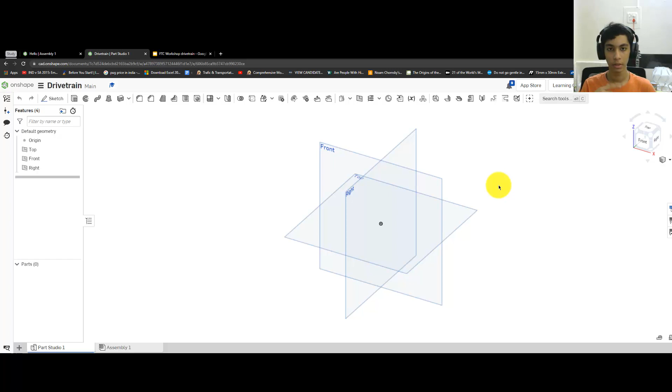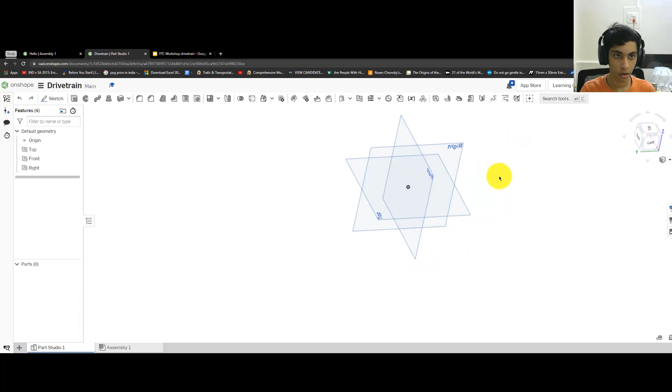Just a few basic things about Onshape: I would suggest that you guys use a mouse while doing the CAD in your software, it becomes much easier. If you do a right click on your mouse, you will be able to revolve around in this manner, and if you click on the scroll button, you will be able to pan around and move around the model. So first we can see Part Studio and Assembly, these are the two tabs which are open in Onshape.

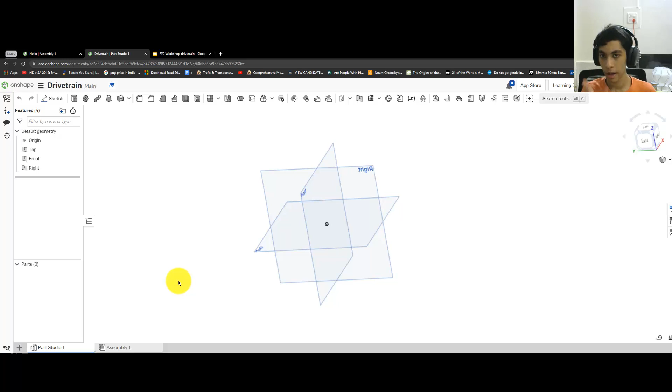What we want to do next is first import all the parts from the part list folder which I will be providing. We click on Insert New Element, the plus sign, then click on Import.

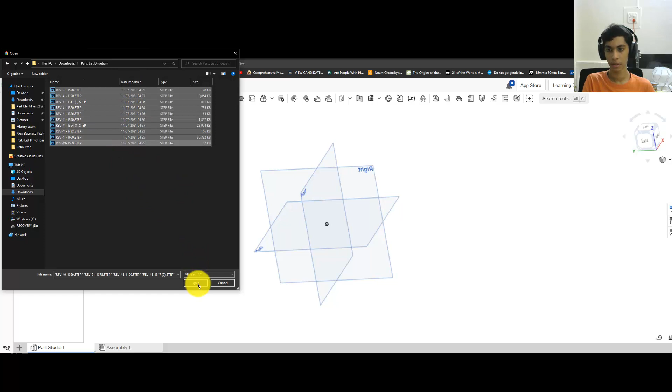Here you will need to search for the folder. There it is, Parts List Drivetrain. And then I would like you guys to select all of the files. There are about 10 of them, and click on Open.

Next, if you see something like this, you can go ahead and select Combine to a Single Part Studio and then click on OK. You will see a couple of notifications, which means that the parts are uploading, and this takes about 2 to 3 minutes.

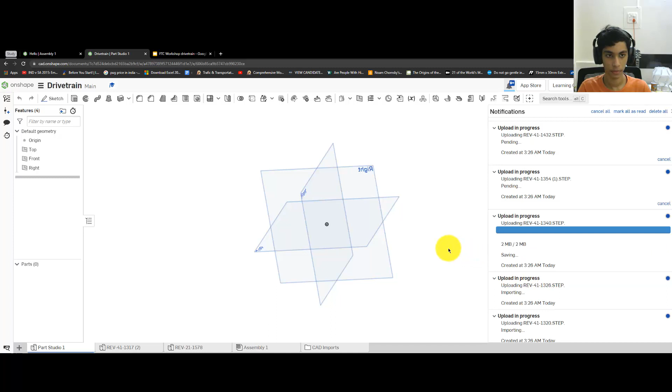So you can just look around in this menu itself if all the parts have been uploaded. As they start uploading, at the bottom you will be seeing more tabs coming up.

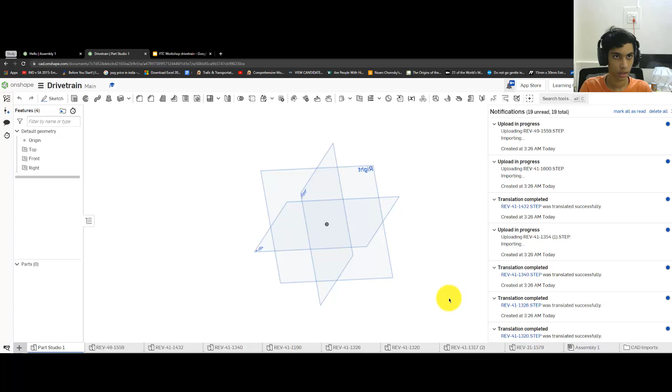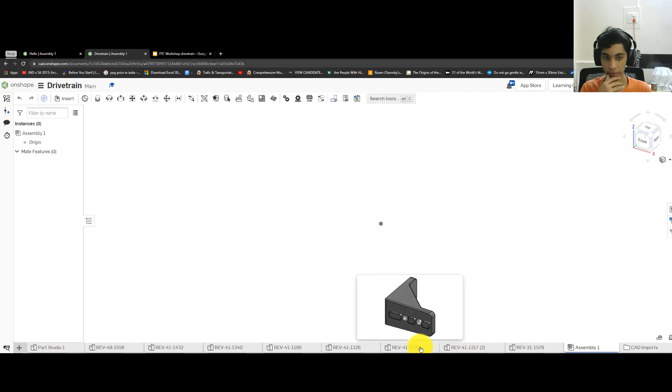Next we want to click on Assembly 1, where we will assemble all the parts. Just to give you an overview, this is a motor mount part which we will be using. This is called a pillow block, which will be used later on. This is a corner bracket, and there are many such parts which we will be using. So first go ahead to Assembly 1.

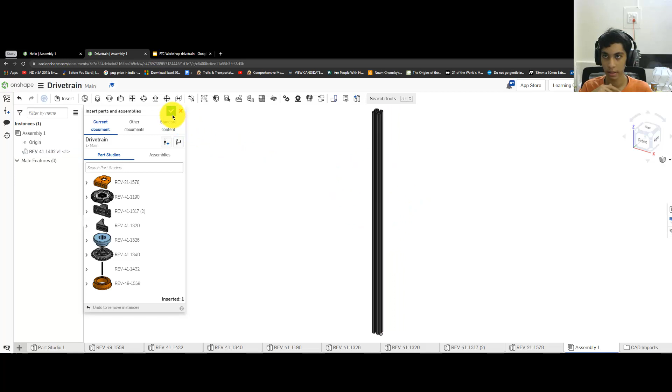Then we will go ahead and click on Insert, and I want you to import Rev 41-1432 in here. Once you've done that, click on the tick mark, and this is our first part.

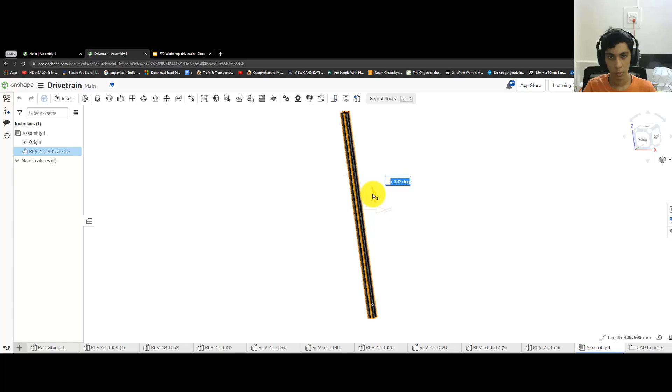Now we will select this by clicking on it. You can revolve by a right click, you can do pan with the scroll button. What we want to do next is get this laying flat. Right now it's vertical, so we will select that button and type out 90 degrees, then click on the white space, and now it has become horizontal.

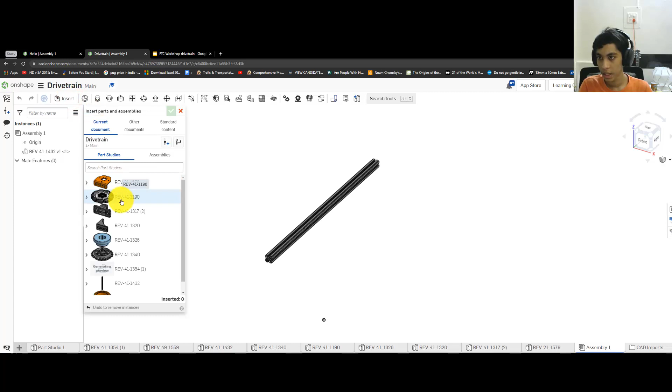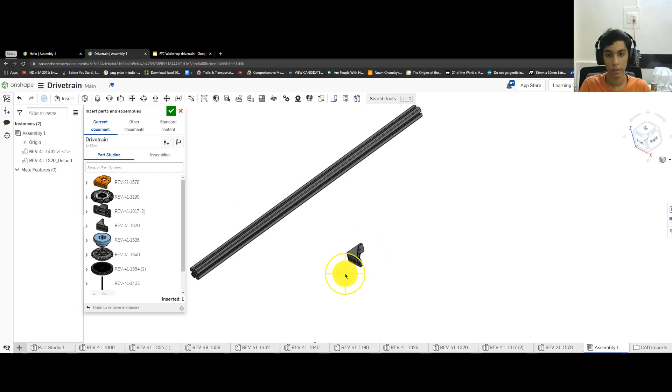Next we will need to insert the corner bracket, which is rev-41-1320. If you click on that, your mouse pointer will get the part in the workspace, and you can then use the part wherever you would like to. Then click on the tick mark and we are good to go.

So if you revolve around now, here we will try to join this part, which is the corner bracket, with the extrusion, which is the main structural component of the robot. We have used a lot of extrusions to make the wheelbase or drivetrain strong, and we have used corner brackets very often, so we will be doing that here too.

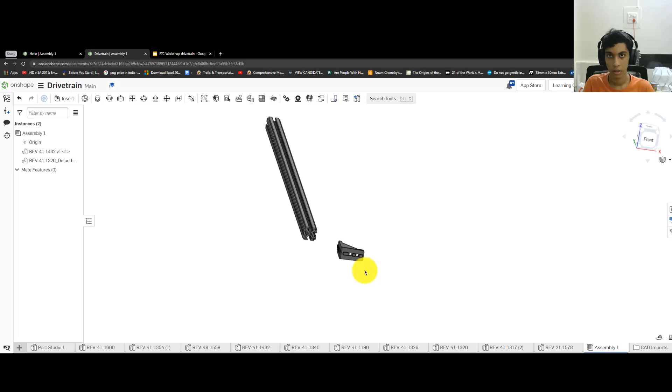Now what we have to do is go to this menu over here and click on Fasten Mate. Once you do that, you will see such a menu appear.

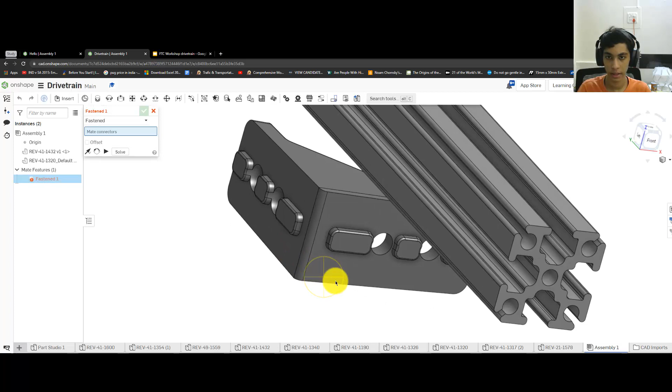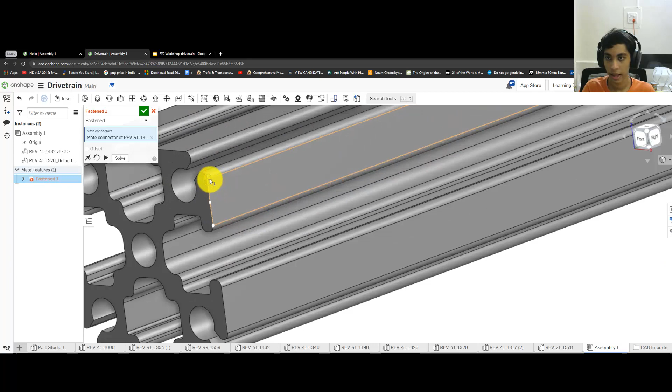Now you have to zoom in to the corner bracket. Hover your mouse over the flat surface of it, and you can select the point in the corner where my cursor is. Then zoom out, revolve again with the right click, zoom into the extrusion, hover over it, and do a left click on that point. If you zoom out and revolve a little, it looks something like this.

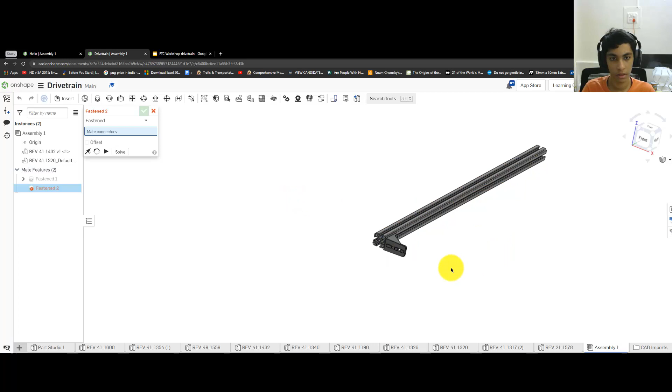And then you click on the tick mark. Now you have to close this button for a fasten mate too, because we don't need another fasten mate.

Now if you try to move it around, if you do a left click on it and try to drag it around, both the parts will be intact whatever you do. If you move this around too, they will always move together.

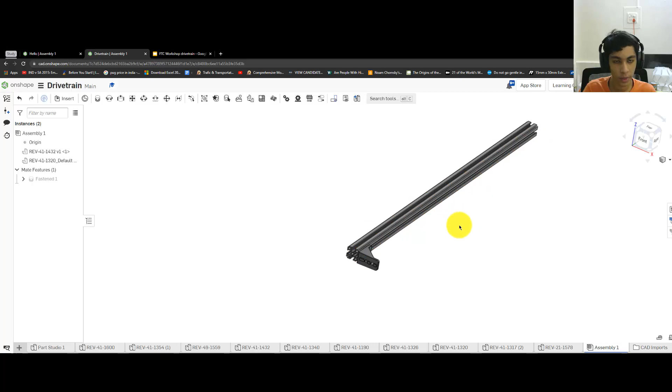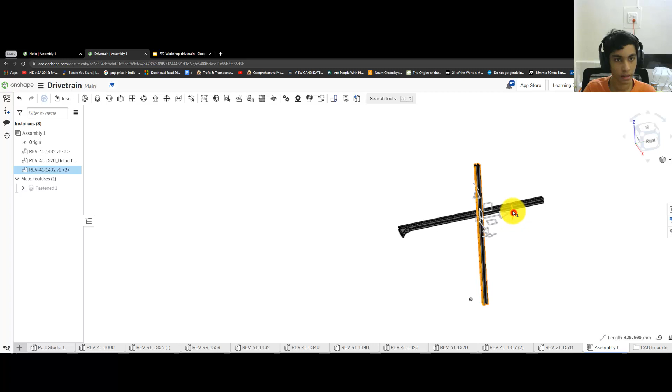Next we click on insert, and insert the rev-41-1432 extrusion again. Click on the tick mark, and we want to make this 90 degrees laying flat. So we will click that button, type 90 degrees, press enter.

But this time we need it turned in this fashion. So if you go to the top view, we want something like a plus sign, so 90 degrees, and press enter.

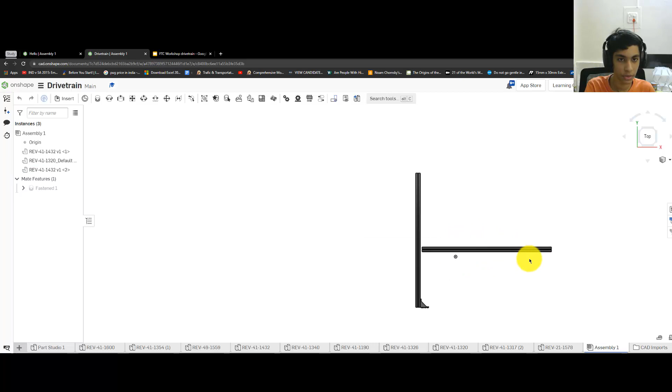This extrusion has to be placed somewhere over here, and so we will also do another fastened mate. To do that, we will click on fasten mate, and hover over the new extrusion. So we will select that point.

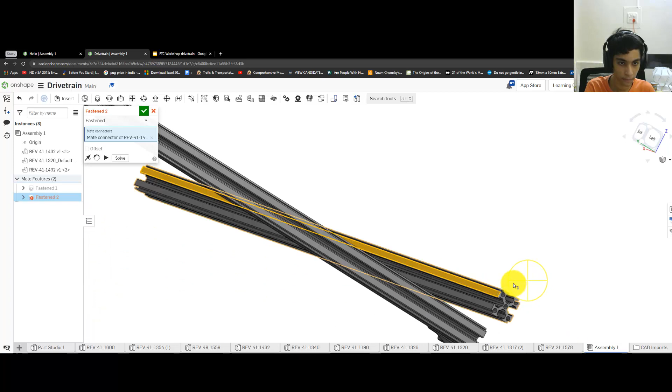After selecting that point, we will zoom into the corner bracket from earlier, and select that point again on the corner bracket, then click on the tick mark, and it shall look something like this from the top. They will always move together now.

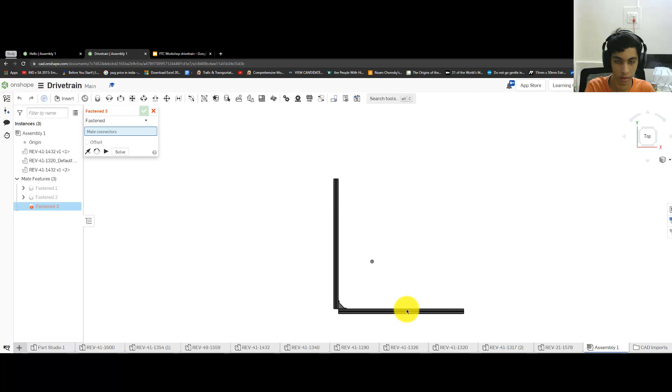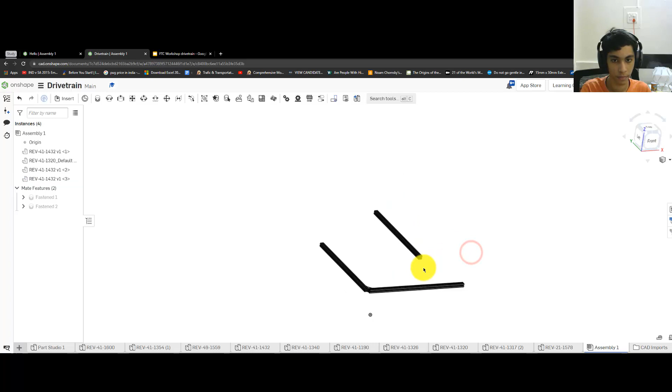Now we want to insert another extrusion, and this one too has to be horizontal. Along with the extrusion, we will need another corner bracket.

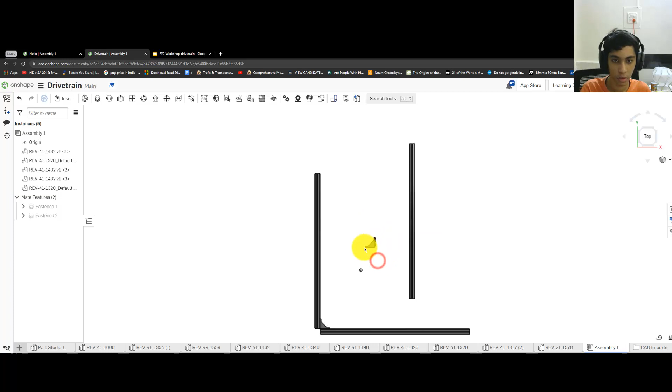The corner bracket has to fit over here. So we will rotate this by 90 degrees and click on enter. So we want this kind of an orientation for the corner bracket to come here.

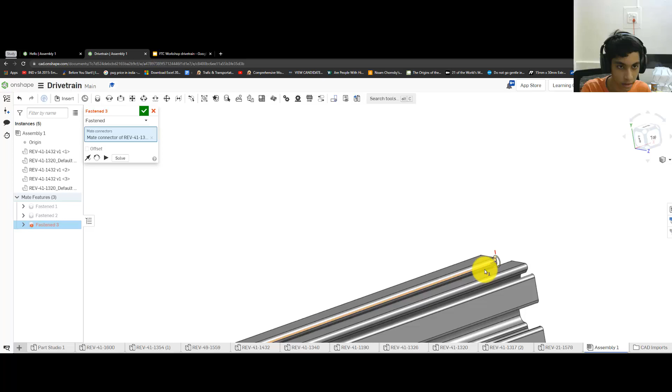We will click on fastened mate. We will hover and select the top right corner point. Then we will revolve a little and go and select this point over here. Once you manage to do that, it will look something like this. We will press on the tick mark.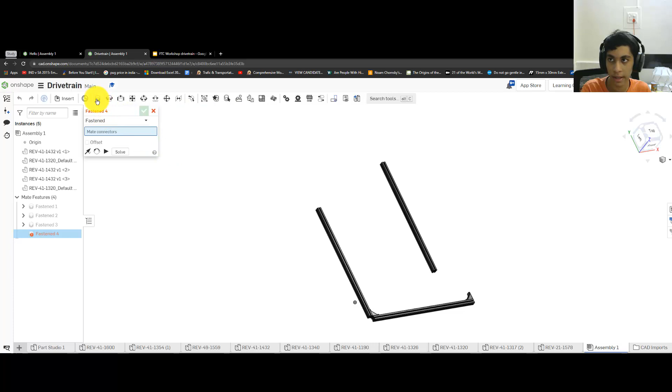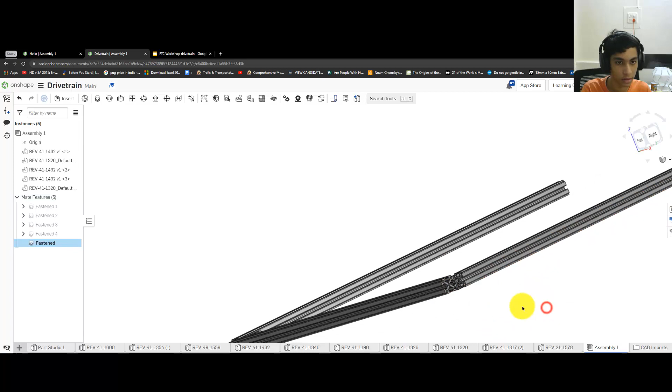Now to join this extrusion to that corner bracket, you have to select fasten mate, zoom in, select that corner point, revolve a little with the right click, and go ahead and select the top left corner point here, then click on the tick mark. So now from the top you should see something like a U shape which you have made, and this all moves together whenever you try to drag it.

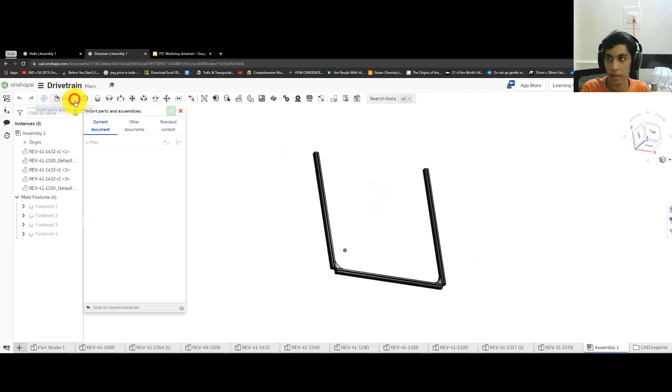Now to close the U and make it a proper square from the top, we will click on insert, insert a corner bracket, then click on the tick mark.

This corner bracket needs to join an extrusion on top to close the square. So it has to be positioned something like this, which is some sort of an L shape but inverted.

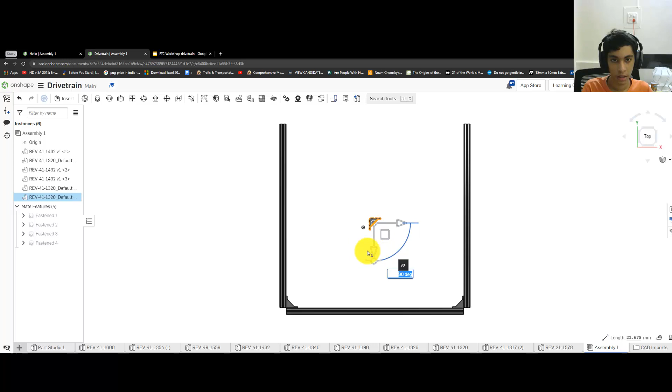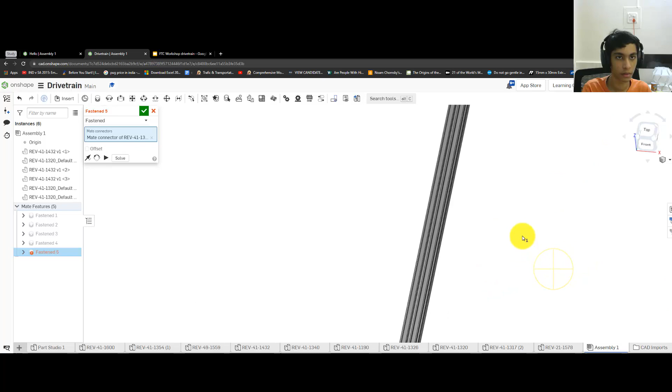We will then click on fasten mate. We will hover over, select the top right corner, then zoom in and select this point here.

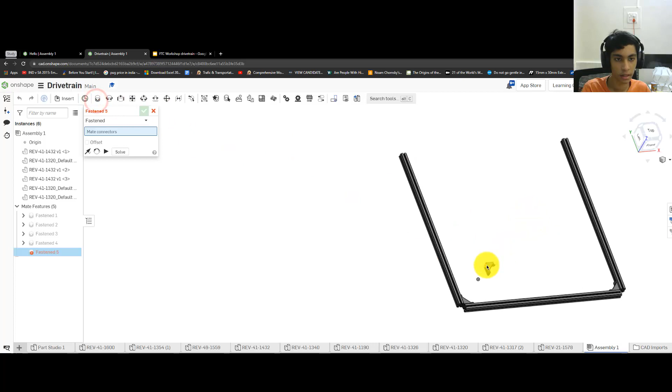I think it's gotten something wrong. We can try that again. So you can just cancel it and click on fasten mate. I think we should select the top left corner this time, so it's easier. Revolve a little, zoom in, and select that point. And now we have a corner bracket.

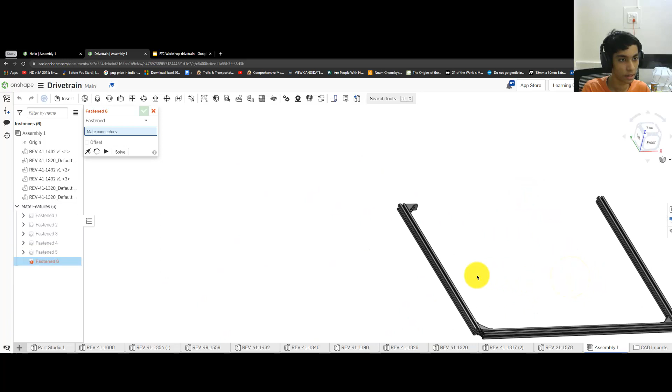Similarly, to join the extrusion from this end, we need another corner bracket. So we will click on insert, insert a corner bracket. And the corner bracket has to be oriented something like this, 180 degrees, and click on enter.

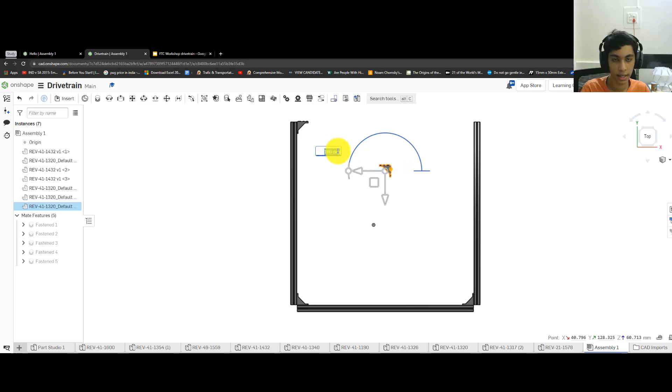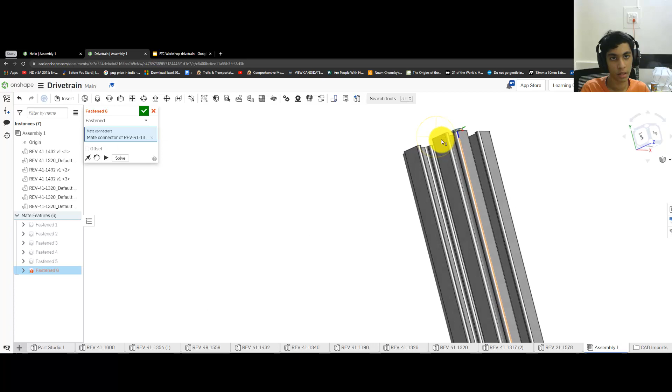We will click on fasten mate, select the top right corner, zoom in, revolve a little using the right click, and place it over there and click on the tick mark.

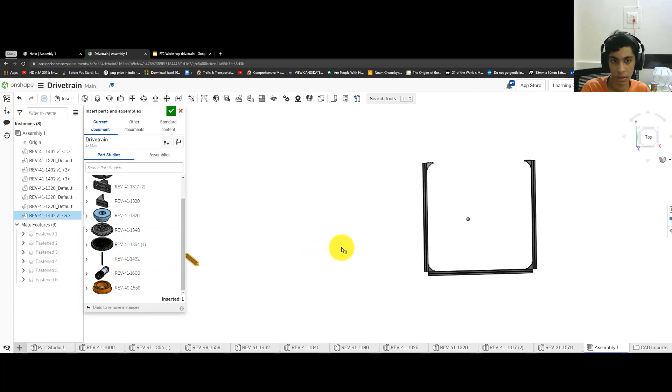The last step to making the frame is inserting another 1432 extrusion which comes there. This extrusion has to be aligned horizontally, so we will align it horizontally. Type out 90 degrees and click on the white space.

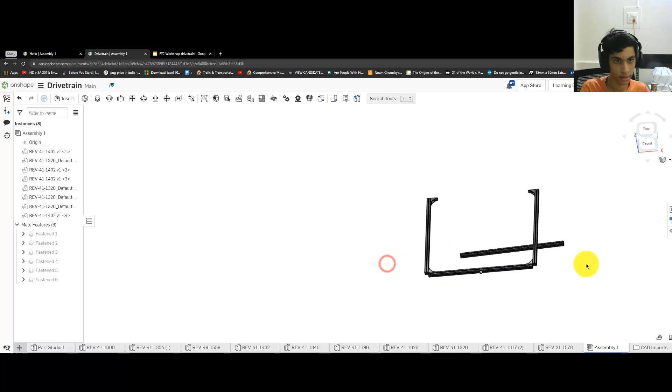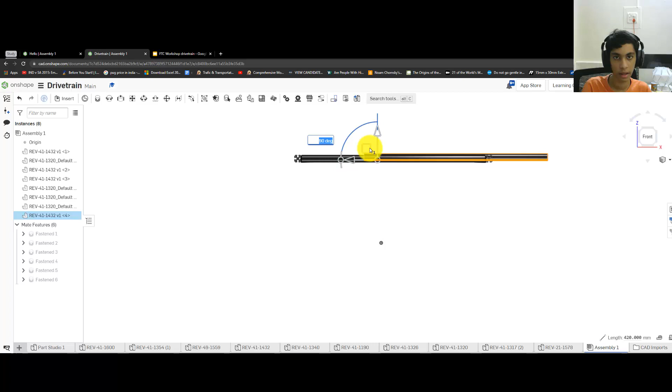You can do a Control plus Z to get it back into the original state. I think there was some problem, so we can do that again. Control Z would work here. We want it to be 90 degrees to lay flat. Okay, we will click on fasten mate.

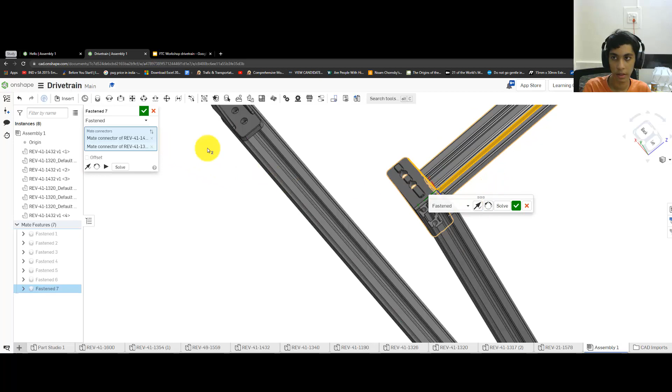And it's just following the same steps that we had followed before, doing a little revolving, moving around. I think I selected the wrong point there, so I will do that again. Click on the tick mark, and if you guys see, now we've formed a full square which resembles the square on the outside of the drivetrain.

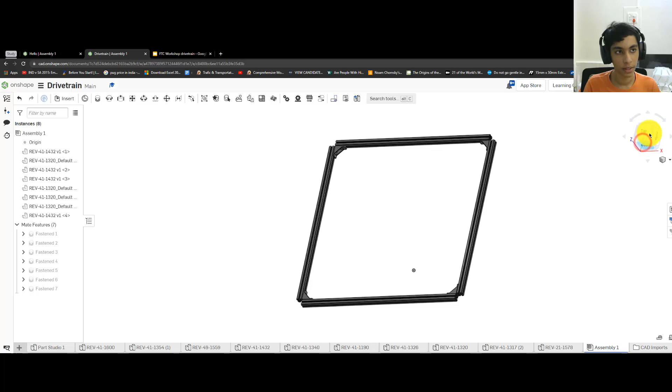Our next step is to introduce the bars in the center, which will add more strength to the square we have made, the chassis or drivetrain structure which we need. For that, we will need more extrusions, which we will either insert, or there's a shortcut for doing that, which makes everything much easier.

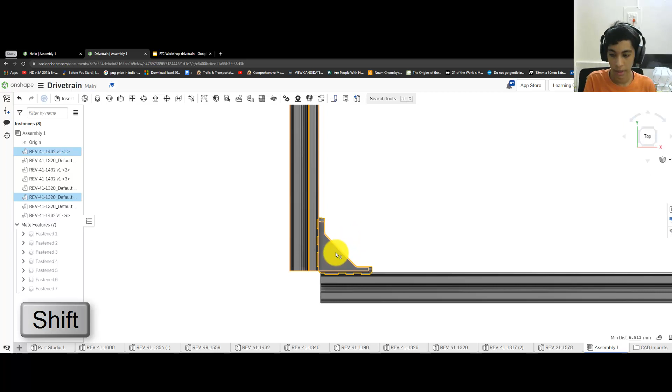So what we can do is go to the top view. We can first click on the extrusion, press the shift button, zoom in and select the corner bracket, then zoom in and select the other corner bracket also while pressing the shift button, and you will now be able to select all three of them together.

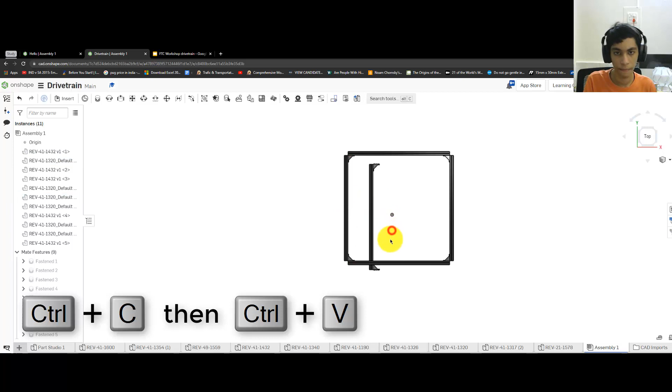Now what we want to do is press Ctrl plus C to copy it, and Ctrl plus V to create a paste of the copy we have done. If you try to see now, you can find the copy of the three parts we had selected earlier, and this copy will act as a bar which we wanted in the center. There are four of them here: 1, 2, 3, and 4.

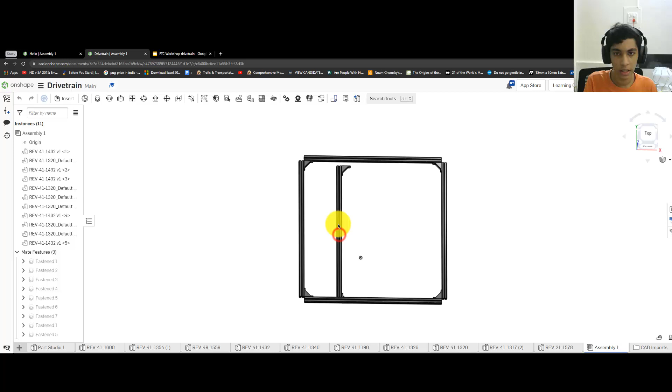And if you try to move it around, it will always retain the joints which we had made earlier, so the parts haven't gotten separated.

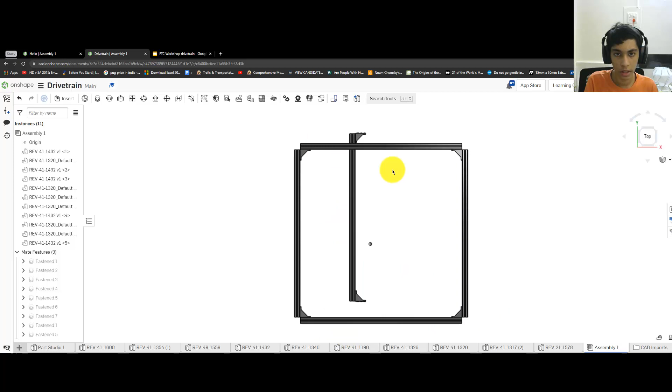We will then click on Fasten Mate, but this time Fasten Mate will not work for us because we need to be able to move this bar wherever we want inside this frame. So now we will select the Slider Mate instead, and if you selected the Fasten Mate by mistake, you can go ahead and select the Slider Mate.

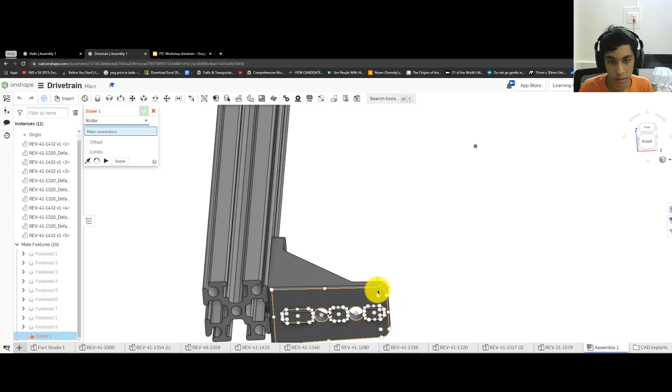Now we want to zoom in and select the top right corner. We want to revolve around and zoom in and select one of the surfaces on the extrusion, so that corner bracket now comes over here before you press the tick mark.

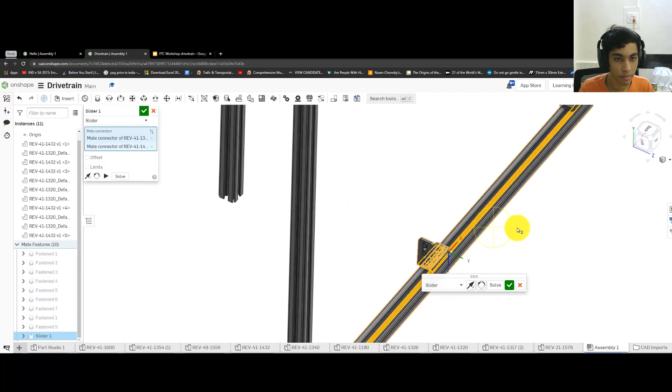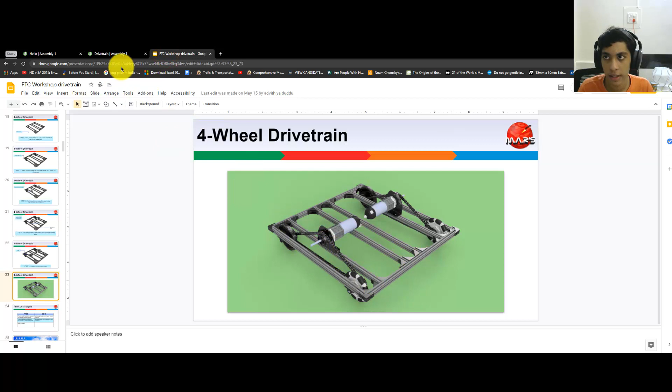But if you notice over here, the extrusion is somewhere near the extrusions on the left hand side. So for that, we will click on offsets, and we will offset this by a little bit, in the X direction.

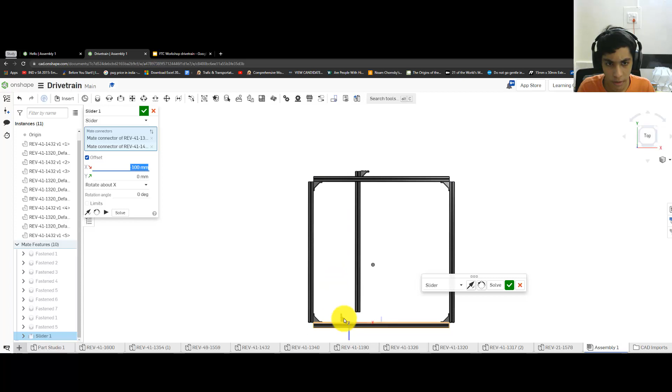So we want to move it over here, and in the X direction, let's try minus 100 mm. And minus 100 mm seems to work perfectly. So if you see, the position has moved from here initially to over here in the X-axis.

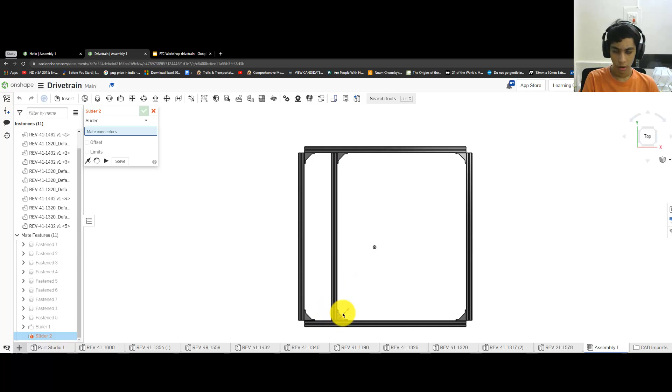And if you click on the tick mark, then all the parts which were joined to the previous corner bracket will also snap in.

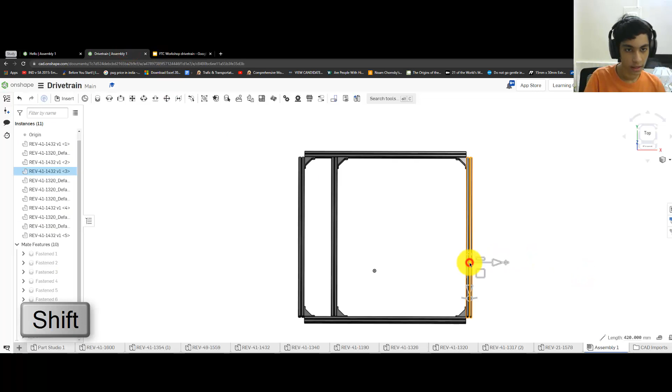Similarly, we want to make another copy of this side, so that we are able to make the supporting extrusions in the center from the right hand side. So we will first select this extrusion, then press the shift key, select that corner bracket and this corner bracket, Control plus C, and then Control plus V.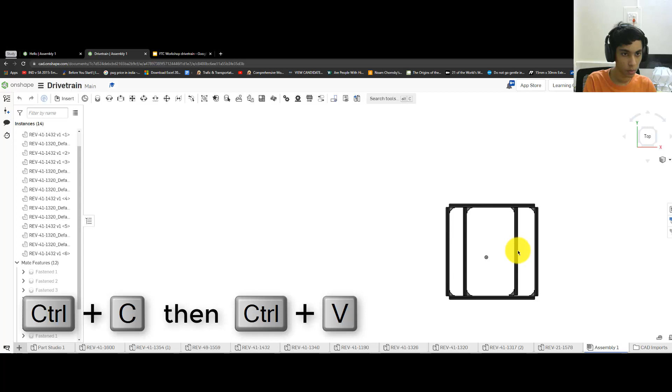And if you see now, you can find a copy of the extrusion which can be moved around. So we want it somewhere over here, but we need to make a joint, or a mate for it. So we will do the same procedure like before.

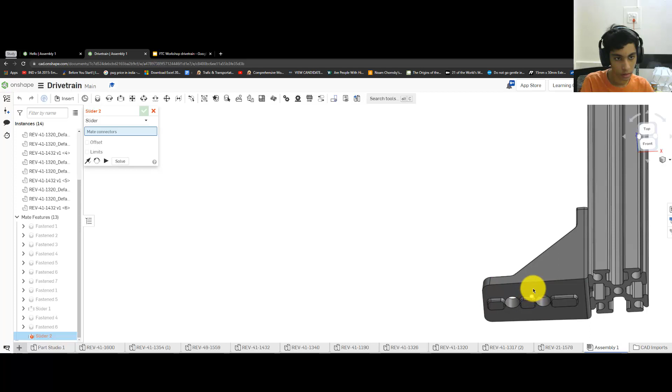We will select slider mate. We will go ahead and select the top left corner, then zoom in and select this surface of the extrusion.

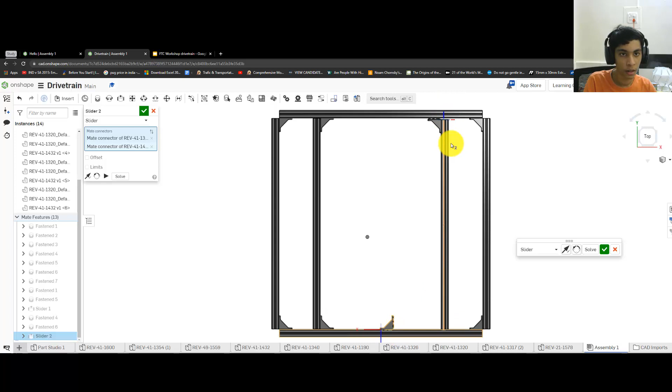Now we want this to be somewhere closer to the right hand side, the outer extrusion. So in the X direction, we will have to first select offset and move it by minus 150 mm like we did before. But this one seems a little too much, it's too close. Let's try minus 100 mm, and this seems to work fine.

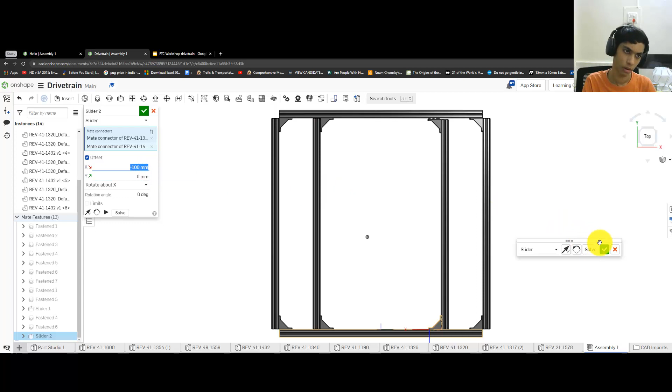And we will click on the tick mark so that everything joins in. And now if you try to move it all around, it will remain fixed always.

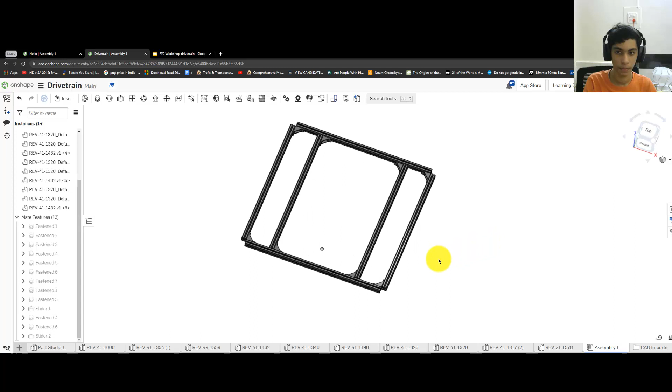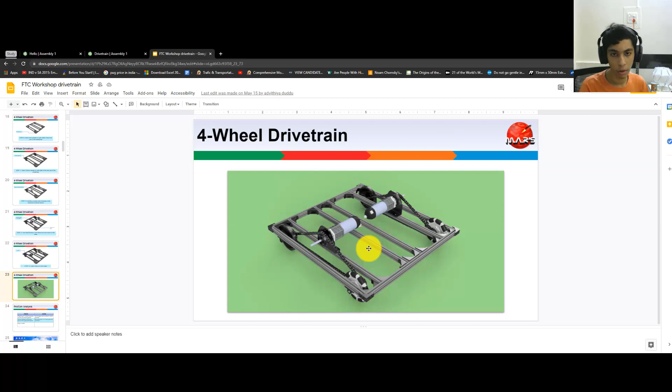And if you revolve around, you will be able to notice that we have made a strong and sturdy structure for the wheelbase, and this is a very important part of the robot, since our four-wheel drivetrain is going to be the basis or the bottom foundation of the robot, which will be made for the robotics challenge this year, which you guys will be making.